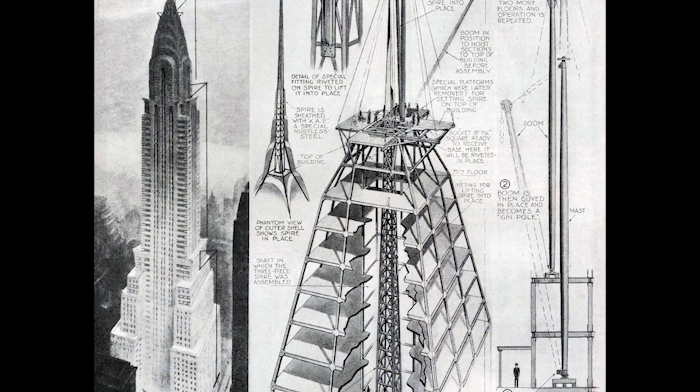The construction timeline defied every established practice in the industry. European methods typically required 3 to 4 years for buildings of comparable size, with most of that time dedicated to careful masonry work and deliberate structural assembly. Chrysler's 19-month deadline meant that traditional approaches were impossible. His team would need to develop entirely new methods for materials handling, workforce coordination, and safety management.

By June 1929, 3 months after groundbreaking, the steel structure had reached only a few floors above street level. Critics whispered that Chrysler's gamble was already failing, that his automotive assembly line thinking couldn't translate to the vertical challenges of skyscraper construction.

Construction foremen throughout Manhattan watched the project with professional skepticism, certain that speed and safety remained mutually exclusive at such heights. European observers expressed particular doubt about American steel frame techniques. Continental construction relied heavily on masonry and stone, materials that required careful, deliberate installation but provided proven stability. The American approach of hanging everything on a steel skeleton struck European engineers as fundamentally unstable, especially when attempted at unprecedented speeds.

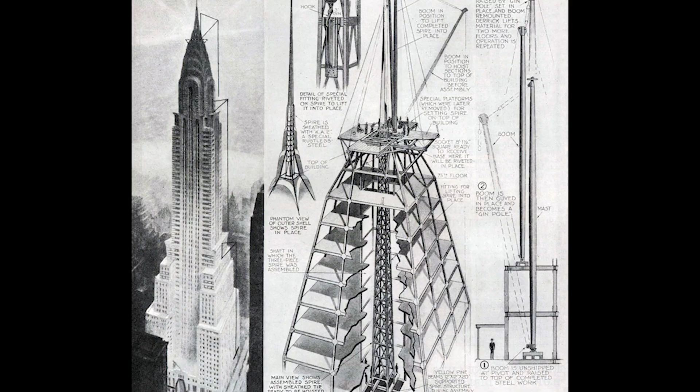The project's financial pressure intensified these technical challenges. Chrysler's personal financing meant that delays directly impacted his automotive business, while the competitive race with Severance's building demanded constant progress updates. Every day of construction delay represented thousands of dollars in additional costs and lost competitive advantage.

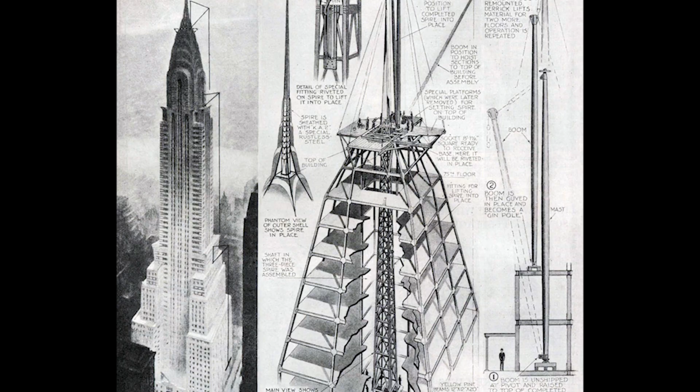Yet Chrysler remained confident in his mysterious precautions for worker safety. When pressed by reporters and city officials, he refused to detail his methods, telling skeptics that if they knew the protective measures he had implemented, they might change their minds about the project's feasibility. His automotive experience had taught him that worker protection and operational efficiency were complementary rather than competing priorities.

The question facing Manhattan that summer was whether American industrial innovation could overcome the deadly arithmetic that had governed construction for decades. 62 workers' lives hung in the balance of an untested theory about systematic safety and precision manufacturing applied to unprecedented heights.

By July 1929, the mysterious precautions Walter Chrysler had promised began revealing themselves through systematic innovations that transformed every aspect of construction operations. His automotive assembly line experience had taught him that worker safety and production speed were not opposing forces, but complementary elements of efficient manufacturing. The same principles that had revolutionized automobile production in Detroit were now being applied 800 feet above Manhattan streets.

Chrysler's first innovation involved completely reimagining materials handling and worker movement throughout the construction site. Traditional skyscraper projects relied on primitive hoisting systems that required workers to manually guide steel beams and building materials to their destinations, creating constant opportunities for crushing injuries and falls. Chrysler implemented a coordinated system of multiple hoists operating on precise schedules, with designated landing areas on each floor and trained crews responsible for specific materials handling tasks.

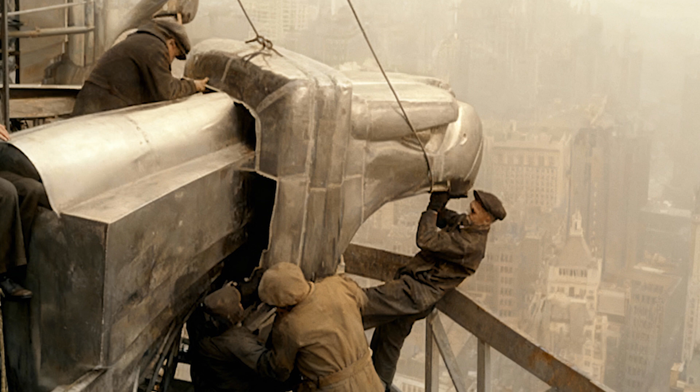William Van Alen's architectural innovations complemented Chrysler's operational methods through design elements that prioritized both worker safety and construction efficiency. His steel frame techniques eliminated much of the dangerous masonry work that traditionally claimed workers' lives on high-rise projects. The building's exterior would feature decorative elements made from Nirosta stainless steel, an 18% chromium, 8% nickel alloy that represented the first American use of this German-developed material. These prefabricated decorative components could be installed with precision and safety that stone carving could never match.

The Nirosta steel represented more than just aesthetic innovation, it embodied Chrysler's commitment to superior American materials and manufacturing methods. European construction relied heavily on stone and traditional masonry that required skilled craftsmen working in dangerous conditions hundreds of feet above street level. Chrysler's approach used precision-manufactured components that could be installed by trained workers using systematic procedures rather than individual craftsmanship.

Worker productivity increased as crews developed confidence in Chrysler's safety systems. The traditional construction culture of accepting casualties as inevitable began giving way to expectations that every worker would complete his shift and return home safely. This psychological transformation proved as important as the mechanical innovations.

Workers operating with confidence in their safety equipment and procedures could focus entirely on precision and speed rather than constant survival calculations. The project's secrecy added operational complexity, but also demonstrated the effectiveness of Chrysler's systematic approach. Even though workers couldn't know the building's final height, they could execute their assigned tasks with complete confidence because every procedure had been planned and tested in advance.

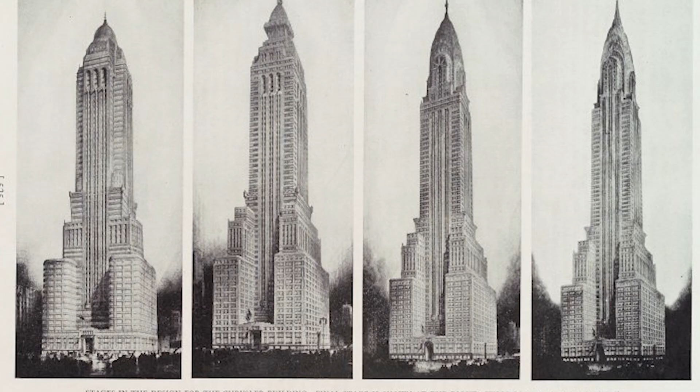The building's progress represented vindication of American industrial methods applied to construction challenges. Chrysler had proven that systematic organization, worker protection, and precision manufacturing could achieve what European tradition considered impossible: unprecedented construction speed with zero worker fatalities. The question remaining was whether these innovations could survive the ultimate test of completing the world's tallest building while maintaining the perfect safety record that had confounded every expert prediction.

The completion of the steel structure in September 1929 marked only the beginning of William Van Alen's most audacious gamble. Deep within the building's upper floors, hidden from competing architects and curious observers, construction crews were secretly assembling what would become the Chrysler Building's ultimate triumph: a 125-foot steel spire that would crown the structure and claim the title of world's tallest building. Van Alen had designed the spire in 3 separate sections, each weighing thousands of pounds and requiring precision engineering that pushed American steel fabrication to its absolute limits.

The secrecy surrounding this element was complete. Even most of the workers constructing the building remained unaware of the spire's existence. Only a select team of steelworkers and engineers knew that the building's true height would far exceed the 77 floors visible from street level. The competition with H. Craig Severance's building at 40 Wall Street had intensified throughout the summer, with both projects racing toward completion and the coveted height record. Severance's conventional approach was producing steady progress, and his building appeared likely to claim the tallest structure title through proven methods and realistic timelines. Van Alen's secret weapon would need flawless execution to succeed.

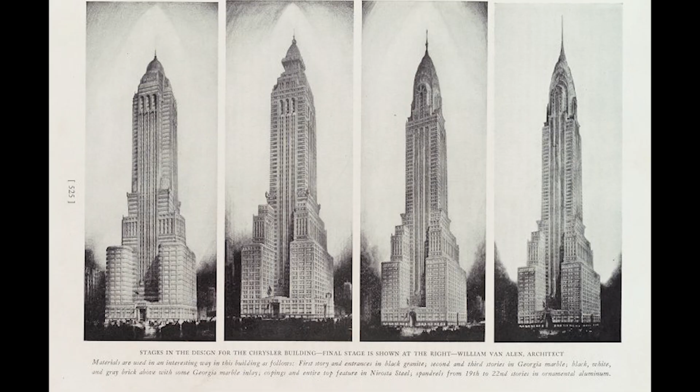Van Alen's architectural vision required workers to perform tasks that European trained engineers considered impossible. The building's Art Deco ornamentation included decorative elements that needed installation at extreme heights using techniques that had never been tested on such a scale. The Nirosta stainless steel components demanded precision placement that left no margin for the improvisation typically required in high-altitude construction work.

The spire's weight distribution presented engineering challenges that pushed American steel frame construction into uncharted territory. Each section needed to be perfectly balanced and secured before the next component could be added, requiring mathematical precision in structural calculations and absolutely flawless execution by construction crews.

A single miscalculation or installation error could result in catastrophic failure that would destroy the entire project and kill dozens of workers. By October, the Chrysler Building had reached its planned 77 floors, matching the height competitors expected would represent its completion. Van Alen watched from street level as the secret spire sections were maneuvered into position for the final assembly sequence. The architectural triumph he had envisioned for months now depended entirely on the skill and courage of American workers operating at heights where no human beings had ever worked before.

The installation process required unprecedented coordination between multiple crane operators, steel crews, and engineering supervisors. Each movement of the massive spire sections had to be calculated and executed with automotive-level precision, leaving no room for the trial-and-error approach that characterized traditional construction methods. Chrysler's systematic safety protocols were being tested under conditions that would determine whether American industrial innovation could truly surpass European construction limitations.

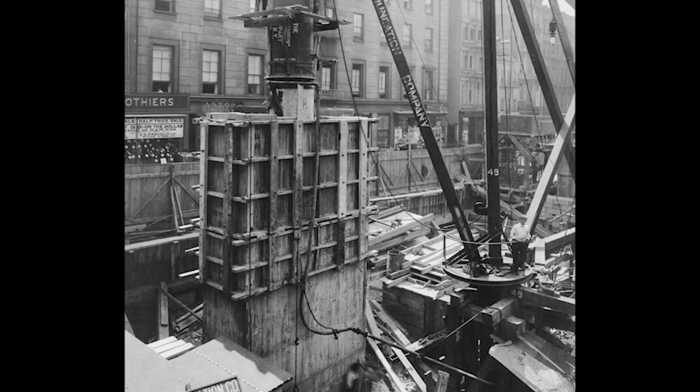His understanding of steel properties, structural engineering, and safety procedures enabled him to perform tasks that European workers would consider impossible. The installation proceeded according to predetermined timelines that reflected Van Alen's confidence in American industrial methods.

By midday, the spire installation had reached its most critical phase. The final section, weighing 27,000 pounds, needed to be positioned and secured while crews worked on platforms that swayed gently in wind currents 860 feet above Manhattan streets.

The psychological pressure on workers intensified as they performed tasks that had never been attempted at such heights, relying entirely on systematic safety procedures and American engineering innovation.

The precision required for final alignment pushed both human skill and mechanical equipment to their absolute performance limits. Tolerances measured in quarter-inch increments became critical factors in structural stability and worker safety. Van Alen's architectural calculations had to prove themselves under conditions where theoretical engineering met practical construction reality at unprecedented heights.

The installation's success demonstrated the effectiveness of Chrysler's systematic approach to worker protection and operational efficiency. Each safety procedure, training protocol, and equipment specification had been developed through careful analysis of automotive manufacturing principles applied to construction challenges. The spire installation represented the ultimate test of whether these innovations could function under the most extreme conditions imaginable.

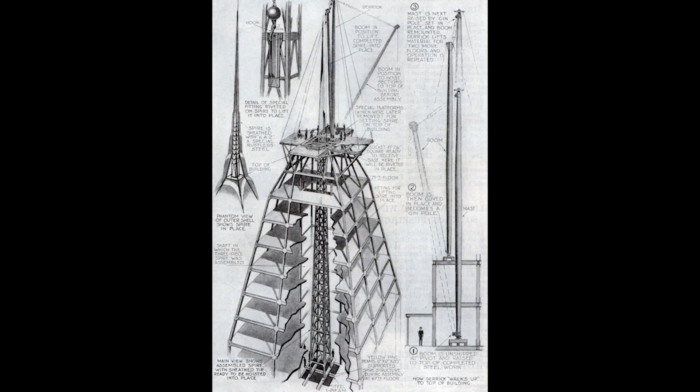The zero fatality record became the project's most significant achievement, surpassing even the height record in its implications for American construction methods. 3,000 workers had completed 19 months of dangerous high-altitude construction without a single death, shattering the mathematical certainty that had governed construction planning since skyscrapers began rising above 15 floors.

Walter Chrysler's vindication speech to assembled reporters and city officials on May 27, 1930, emphasized the human achievement over the architectural record. Standing in the completed lobby surrounded by the Nirosta steel and marble that represented American industrial artistry, Chrysler declared that his building had proven worker safety and construction speed were not opposing forces, but complementary elements of superior engineering. The building's opening to the public drew crowds that marveled not only at its height, but at the systematic innovations that had made its construction possible.

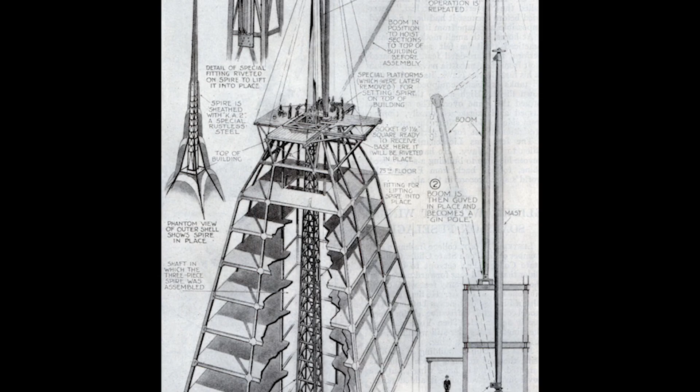Visitors learned that American assembly line thinking, applied to construction challenges, had created methods that protected workers while achieving unprecedented results. The zero fatality record became a point of national pride that transcended architectural achievement.

Romano and Butkus, along with hundreds of their fellow workers, attended the building's dedication ceremony with pride that extended beyond personal accomplishment. They had participated in proving that American industrial methods could protect working men while achieving results that European tradition considered impossible. Their trust in Chrysler's systematic safety innovations had been vindicated through perfect execution under the most dangerous conditions imaginable.

The contrast with H. Craig Severance's conventional approach became stark as economic pressures forced compromises in traditional construction projects throughout the city. Buildings that had relied on proven methods and established financing found themselves unable to adapt to changing conditions, while the Chrysler Building's innovative approaches provided flexibility that enabled successful completion despite unprecedented challenges.

Van Alen's architectural vision had required absolute faith in American workers and industrial methods that had never been tested under such extreme conditions. The building's completion validated his belief that systematic innovation could surpass traditional limitations, creating structures that combined unprecedented height with perfect worker safety records.

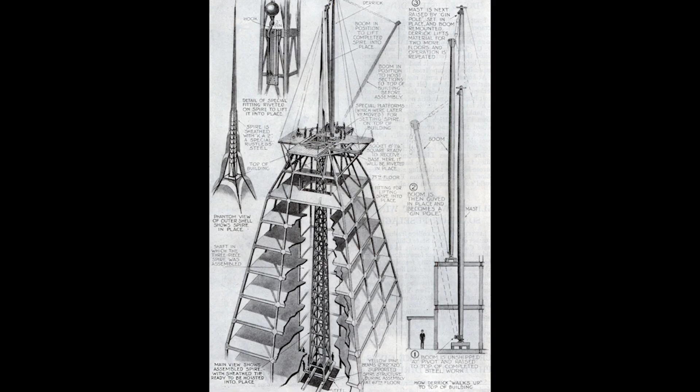The Empire State Building, begun during the Chrysler Building's construction, would surpass its height record within 11 months, but the safety achievement would remain unique. The Empire State project would ultimately kill 5 workers among its construction crew, maintaining the deadly arithmetic that the Chrysler Building had uniquely avoided. Chrysler's personal investment of $20 million had created more than an architectural monument.

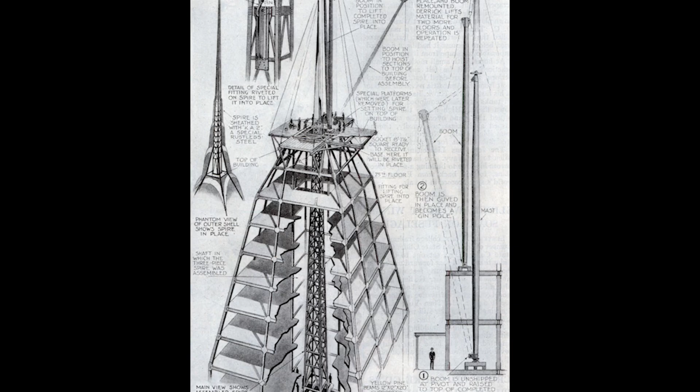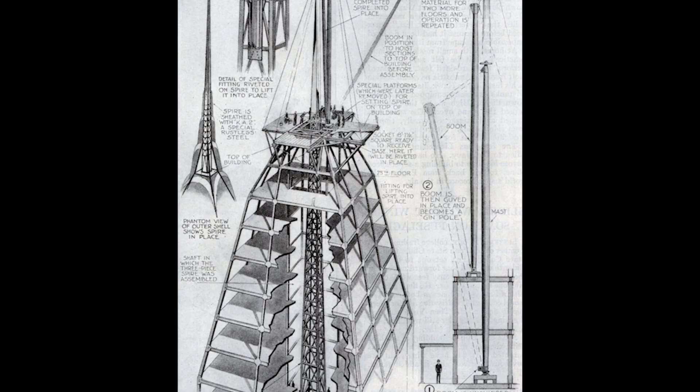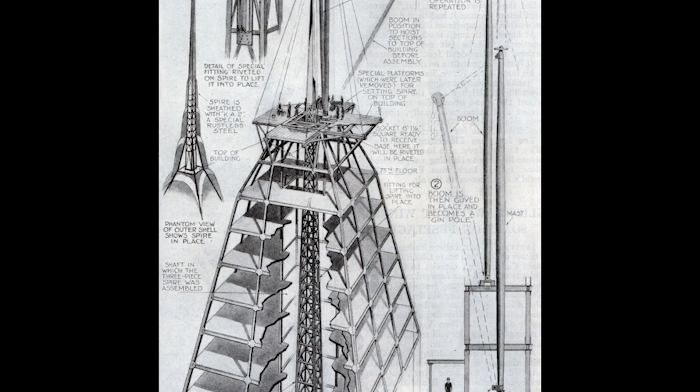It had demonstrated that American industrial principles could transform construction from a deadly gamble into a systematic process that protected human life while achieving unprecedented results. The building stood as permanent proof that innovation and worker protection were not luxury expenses, but essential elements of superior engineering. The zero fatality record established a new standard for American construction, proving that the deadly arithmetic Europeans had accepted as inevitable could be overcome through systematic safety methods and precision organization applied to the most dangerous construction challenges imaginable.